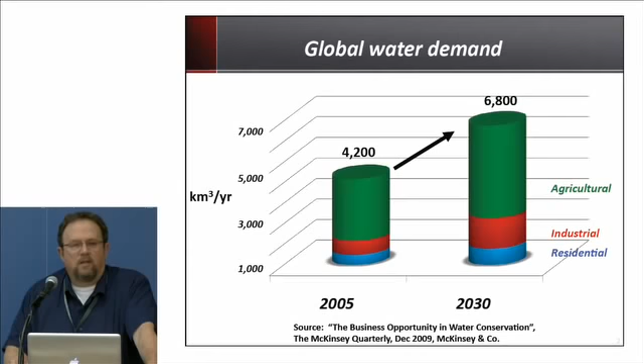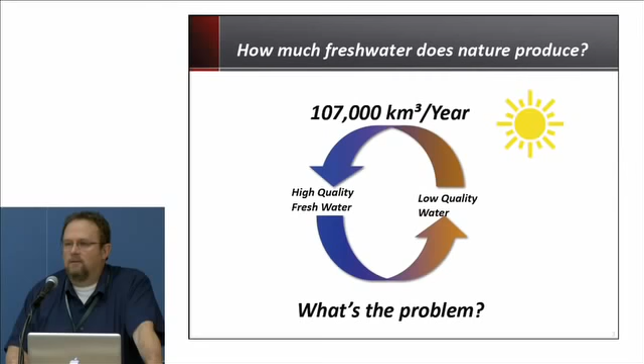6,800 cubic kilometers per year. That's a number to keep in mind now. So if we look at how much fresh water does nature produce, it produces, amazingly, through the sun, through the solar treatment system that we have, 107,000 cubic kilometers per year. We only need about 7,000 of those. So you could ask, what's the problem here, right? There's huge amounts of fresh water being created through the sun.

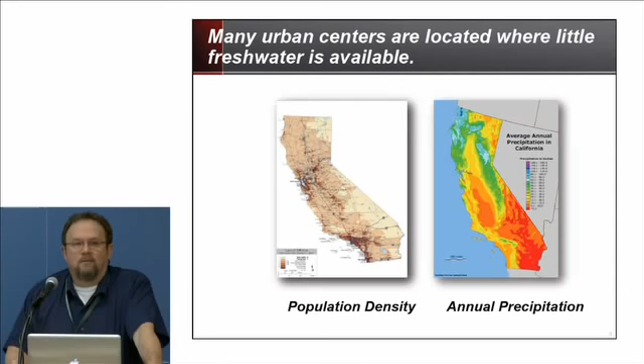So the problem is that many urban centers are located where there's little fresh water. It's a question of where the demand is. Okay, so if you look at the population density here for the state of California, you can see it's dense in regions where there's almost no water. And in the near future, this challenge is going to become even greater for the United States.

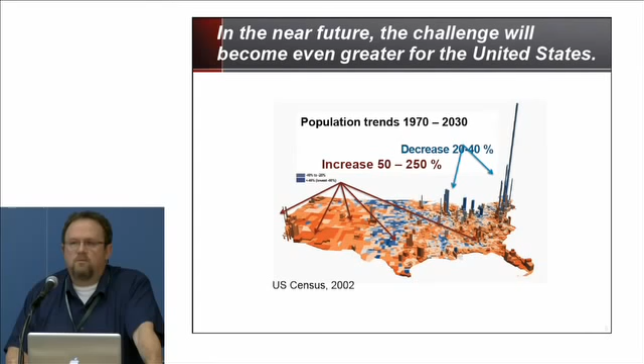So you're looking at projected trends in population and increases and decreases that will occur in different parts of the country, but in particular, in the water scarce regions, populations are going to go up. That's the projection. So it becomes even a more serious issue, this question of water demand and how we'll satisfy this water demand. But this isn't just a problem for the United States.

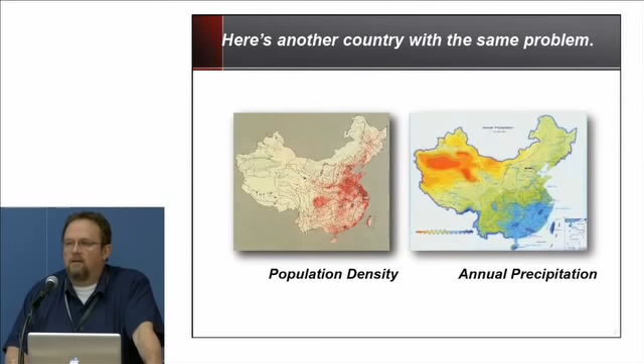So in one case, we're going from north to south with our movement of water. That's how we've solved this problem, right? We transport large amounts of water using large amounts of energy. And in California, from north to south, we're moving about 12 billion cubic meters per year. And in China, the plan is to move 45 billion cubic meters per year from south to north. So it's a huge transportation issue there, involving a lot of water and a lot of energy.

So in terms of the energy demand, for us to do this in California, we need about 2 kilowatt hours or more, depending on where you're dropping the water off, 2 kilowatt hours per cubic meter of water moved from north to south. Some number bigger than that. Now keep that number in your head, 2, and then we're going to look at what are the other options that could compete with moving water over vast distances in space.

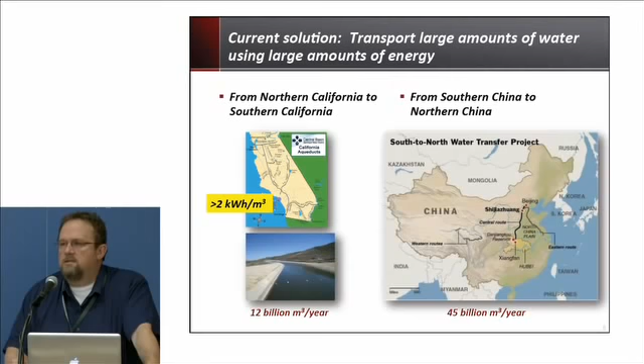So the question is, can we do better, right? And so we want to think about, well, are there local water supplies that we could tap? And of course, one that always comes to mind is seawater. We could get the water from a local supply, which would be along the coast. If you're located along the coast, you could use the seawater as a local source, remove the salt, and then you're in business, right? That would be one approach.

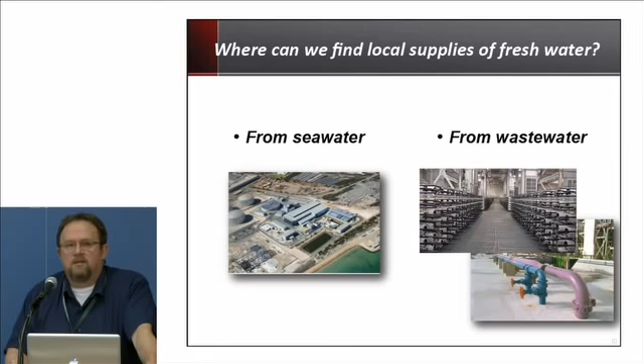Another is from wastewater. It turns out that wastewater, believe it or not, is where people are. It's local, right? It's always there. Okay, so we've got that as another option for a local source of water that could be tapped. So if we look at seawater and we compare it to wastewater, let's just do a side-by-side comparison of what's in seawater and what's in wastewater. In both, we have salt, we have organic matter, and we have nutrients. If we look at the seawater, it has about 35,000 milligrams per liter, about 3.5% of salt.

3.5%. Domestic wastewater has about 500 milligrams per liter. A teeny fraction of seawater, right? In terms of the salt contamination, we want to look at it that way.

Wastewater, by contrast, has this organic carbon, which is both in a dissolved and a suspended form, about 50-50, a little close to that. And you can see the amount that's there. And also there's nutrients in wastewater, which are lacking in seawater. Okay, so there's the big difference between these two. Lots of salt in seawater, comparatively low nutrients, and comparatively low in terms of organic carbon.

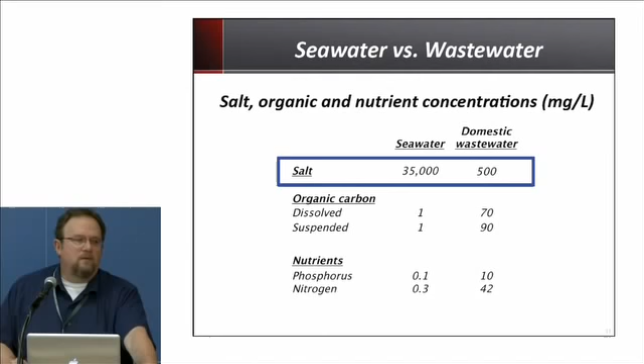So let's focus on the salt. And let's ask some questions about the salt. If we look at the energy for desalination, how much would it take to remove that salt from seawater? Well, it turns out that if these are in kilowatt hours per cubic meter, current value for removing salt from seawater using reverse osmosis technology is greater than 3 kilowatt hours per cubic meter. Now, what was the number I gave you for transporting water from Northern California to Southern California?

So here we've got a process that is significantly more energy intensive than moving that water all the way from north to south. Okay? Now, on the other hand, if we want to remove the salt from treated wastewater, it's hardly anything by comparison, right? It's less than 0.6. And I've also listed there thermodynamic limits. You can calculate, for the concentrations of salt that are in seawater and in treated wastewater, how low it could go in theory.

And you can see for seawater, we're never going to do better than 0.8. Okay, it's just a limit, a thermodynamic limit. We can't beat that. And on the other hand, with treated wastewater, you could go down to 0.03. So we see a huge energy advantage here when we're talking about purification of treated wastewater and removal of salt compared to seawater. Huge advantage.

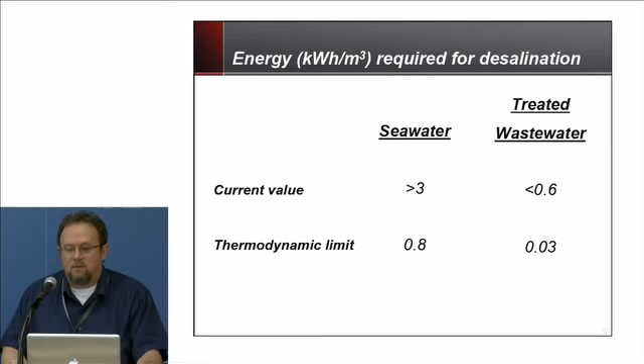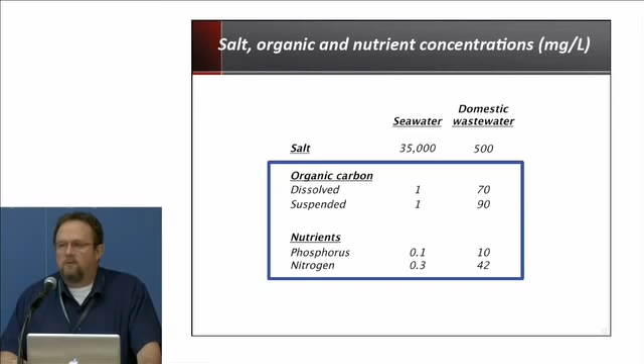So now let's focus a little bit more on the other two parts that are in this comparison, the organic matter and the organic carbon and the nutrients. And you notice in this case, we'd say, oh, advantage seawater, right? Advantage seawater. But is it really? Okay, it turns out wastewater treatment requires about 3% of the electric load of developed countries.

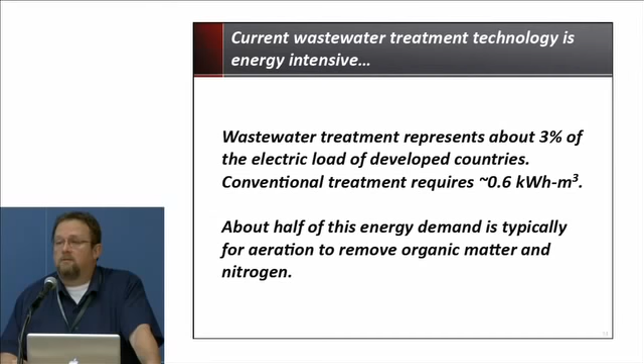And when we treat wastewater using conventional wastewater treatment technology, it requires about 0.6 kilowatt hours per cubic meter. That's used to get rid of the organic matter and the nitrogen that's in the wastewater that we just saw. That's essentially what it does. Okay, so typically about half of that energy requirement, about 0.3 kilowatt hours per cubic meter, is needed just to supply air to the microorganisms that are used to degrade the organic matter and remove the nitrogen. Okay, it's just oxygen.

So here's a treatment plant close to us at Palo Alto that we've worked with the people there for many years now to understand energy use at that plant. And they did this audit, and we've worked with them understanding the audit. And you can see here the kilowatt hours per cubic meter for each of the different units as you move through a wastewater treatment train, where different components of the wastewater are removed as you move through the train.

And what you notice at Palo Alto treatment plant, they do aerobic treatment, and there's no anaerobic treatment for production of methane, okay? Aerobic treatment to remove the organic matter that's present. They also remove the nitrogen that's present as ammonia by burning it essentially to nitrate. And then the last thing is they have this incinerator that they use to get rid of the solids, and it's extremely energy intensive. They have to import energy for this. And so altogether, they end up using 0.9 kilowatt hours per cubic meter.

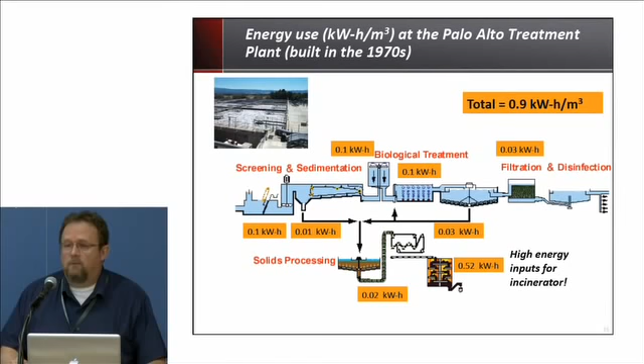That's Palo Alto. It was built in the 70s in that time frame, and most of the wastewater treatment plants in the Bay Area and in the United States were built about that time. They've all basically reached their design life. Okay. So a typical plant, as I said before, uses 0.6 kilowatt hours per cubic meter. The reason this plant is high is because of the incinerator. That's the real reason. Otherwise, it would be below average.

So rather than taking these organics and essentially burning them through providing lots of air or incinerating them, what other thing could we do? If we look at the chemical energy embodied in this wastewater organic matter, what we see is that if we were to take the organic matter out of the wastewater and burn it, it could generate, in theory, 1.7 kilowatt hours per cubic meter.

Rather than being a net energy sink, it could be producing energy. And the same with the nitrogen, the reduced forms of nitrogen. Rather than requiring energy, they could be used to produce energy, and we'll show you how here in a little bit with research we're doing.

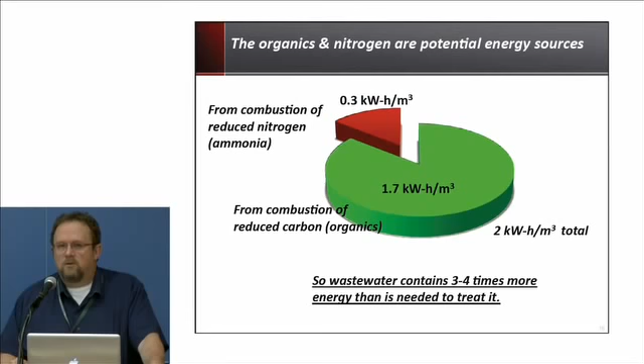So it turns out, remember that number, 2 kilowatt hours per cubic meter to move the wastewater or the water from north to south? That's about how much energy there is in chemical energy embodied in wastewater that could be harvested. So it turns out wastewater has 3 to 4 times more energy than is needed to treat it. 3 to 4 times. So you can easily envision energy neutral wastewater treatment.

So conventional treatment with anaerobic digestion of solids is accomplished this way. You essentially have wastewater coming in. Remember, I told you that some of the organic matter is dissolved and some of it is present in a suspended form that can be settled out. So that suspended matter is typically moved to an anaerobic digester like I'm showing here. And you can see that you can produce energy from that.

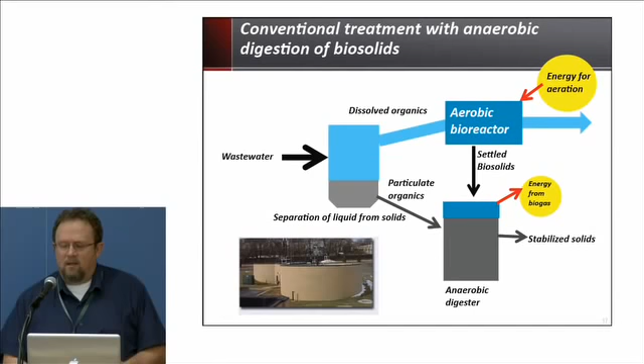Now, this would be a conventional process used, for example, today at the city of San Jose or Sunnyvale or East Bay MUD. So there's many places around the bay that do this. But the other part, the dissolved organics, are typically treated aerobically. Microbial communities that self-assemble are used to burn, essentially, these organics, and the biosolids produced are transferred to the digester to produce some energy. A lot of energy, though, is required for this aeration step.

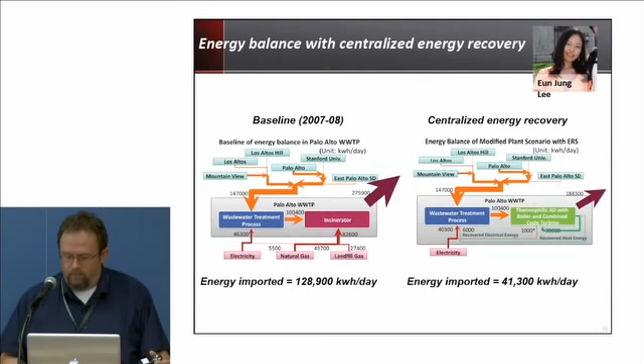If they were just to implement a conventional anaerobic digestion process with the organic matter, like I just showed you, they could decrease significantly from 129,000 kilowatt hours per day imported down to 41,000 kilowatt hours per day. And this is work that's being done by a grad student working with me, Eun Jung Lee. And this is sort of a systems level approach that we're trying to take to that problem.

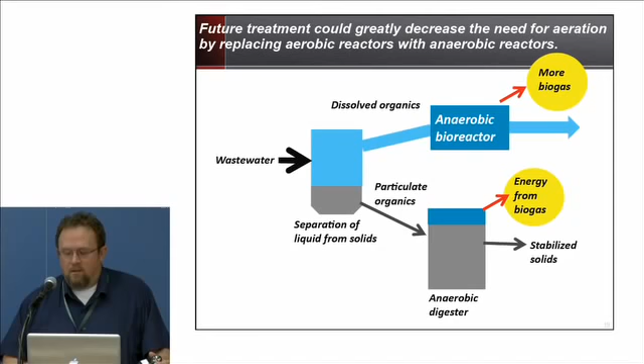So it turns out that that other part of the organic matter that we're not yet recovering methane from could be used to recover methane. So the dissolved organics stream, we could put it in an anaerobic reactor and produce more biogas. And there's other technologies out there that could also generate energy. And we're working on some. But here's one example of a promising process.

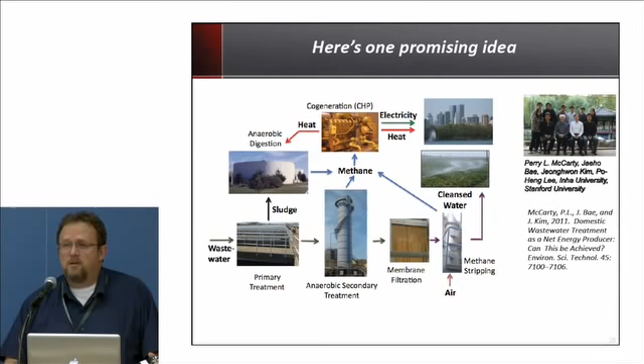Professor McCarty, who's an emeritus professor at Stanford and also working at Inha University in Korea, they developed a process where you can take this dissolved fraction and put it through a unit that looks like this. I hope you see that. Yep. And then it goes to membrane filtration. They purge it with air. And essentially this gives very efficient treatment of the dissolved organic fraction.

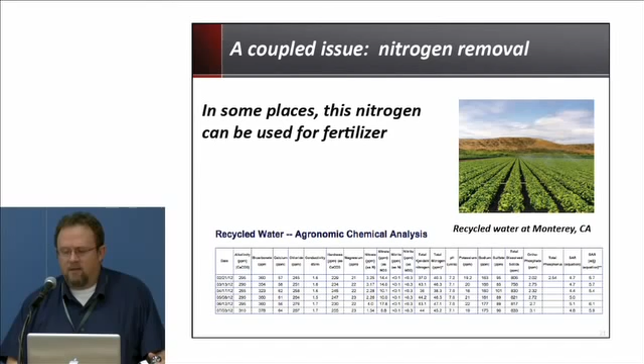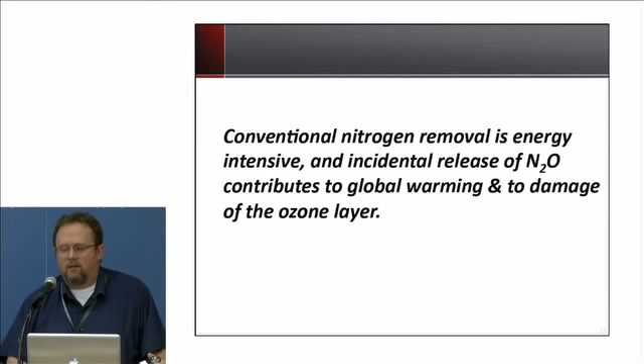Okay, now we still have this issue of the nitrogen removal. In some places, nitrogen can be used for fertilizer. Here's an example of that at Monterey. And other places, we have to remove the nitrogen and get it out. And it's being done at many different treatment plants around the bay. It turns out that the conventional process used to remove nitrogen is energy intensive, and it can incidentally release nitrous oxide that contributes to global warming and damages the ozone layer.

So if we look at conventional nitrogen removal, and here's a little bit of chemistry, we start with a mole of ammonia, and you can add up the oxygen and the electrons that are used to get it to nitrogen gas and remove the nitrogen from the water so that it's not fertilizing the Bay Area, for example. And it turns out that removal of a mole of nitrogen requires about 2 moles of oxygen and 9 moles of electrons and generates biosolids that store about 4 moles of electrons.

It turns out that these 9 moles of electrons could have been used to make a little more than a mole of methane. So we're losing the opportunity to generate energy when we do this process, this conventional process. Now, a new process we're looking at takes advantage of the fact that this process goes through nitrous oxide. And we say, well, what if we just stop this process right at nitrous oxide?

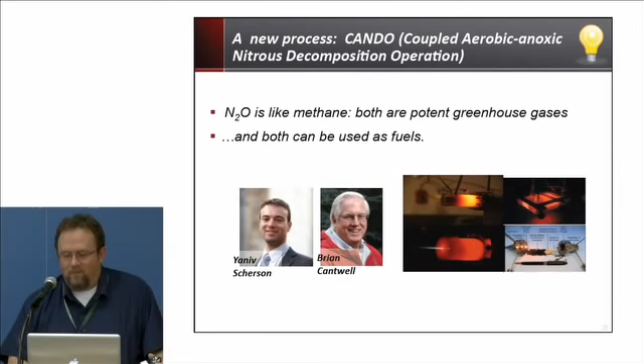Okay? So it turns out nitrous oxide is like methane. It's both a potent greenhouse gas and it can be used as a fuel. And I learned this from Yaniv Scherson, who showed up at my door one day; he's working with Brian Cantwell in aeronautics and astronautics. They're using nitrous oxide as a fuel. They can run these little cool looking devices, as you see here, little engines essentially.

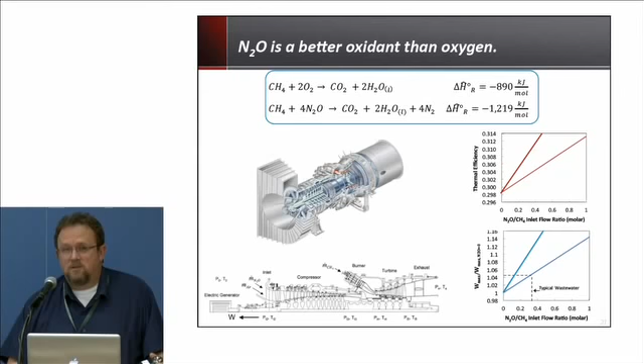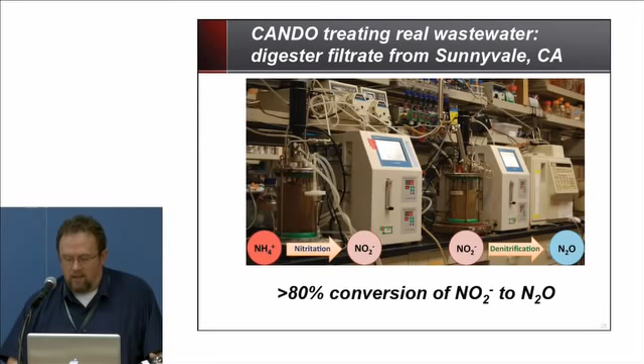And then two methods: biological PHB is a method we use to convert nitrite to nitrous oxide, or a chemical process. And it turns out if you do this, nitrous oxide is a better oxidant than oxygen, so we get more energy from these engines. And that's the big advantage here. It gives an energy boost. So we're treating real wastewater right now from anaerobic digesters from Sunnyvale, California. We've also been doing East Bay MUD more recently and getting high efficiency of conversion of nitrite to the nitrous.

Okay? So this isn't yet scaled up. We're working with groups around the Bay Area to do that. It uses a rapid process. We could maybe get phosphorus removal as well with this process, and we think it will be flexible for retrofits of the existing systems.

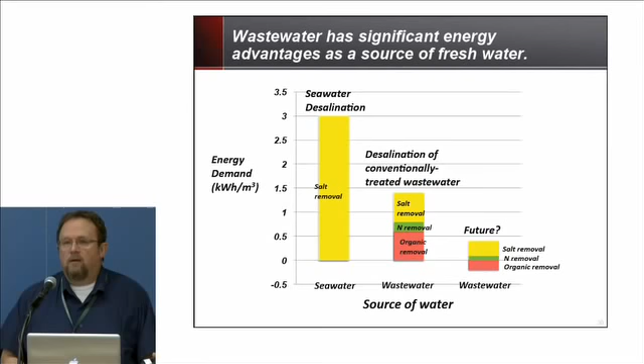If we look at then seawater and wastewater again, there's the energy demands, and we say, let's get the salt out of seawater. This is what it takes, about 3 kilowatt hours per cubic meter. Using conventional treated wastewater and desalination, it would take this much energy now to get the higher quality water. In the future, we could potentially get even lower than that. And so I'm showing the options where you have salt removal, but we can surely get to the point where we can get the organics and nitrogen out without any net energy expenditure.

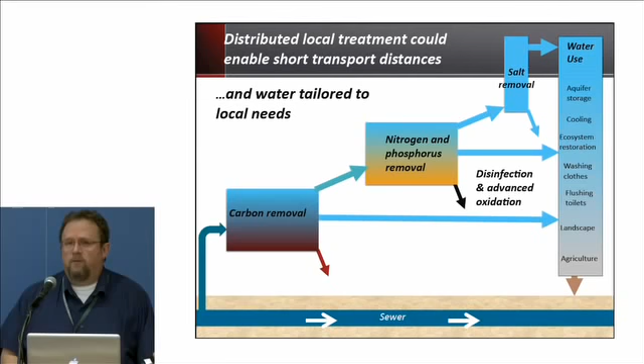So distributed treatment is another thing that we were interested in. This is where you take the sewage out of a sewer, remove the carbon, disinfect it, and then use it for local uses. Another option is to remove even more contaminants like the nitrogen and phosphorus, and then it can be used for higher level things. And if you remove the salt, you can get very high level uses. And as I showed before, we can estimate now what we could be in terms of energy with doing all of those 3 steps and tailoring the water for different applications locally.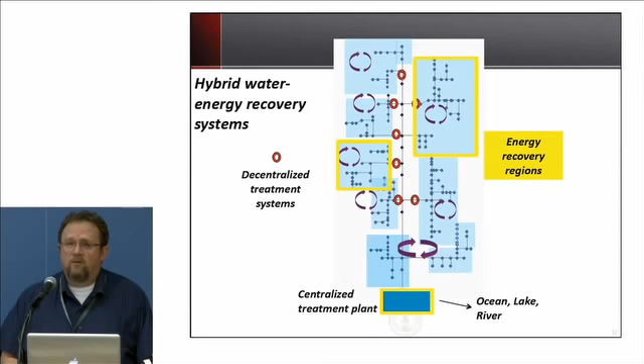So you can imagine hybrid water energy systems where water is recovered in different local places, reused locally through local treatment systems, like that. And we might even have some places where it makes sense to recover energy as well from these organics. And in the future, what I expect is that we'll have more and more integrated water and organics management.

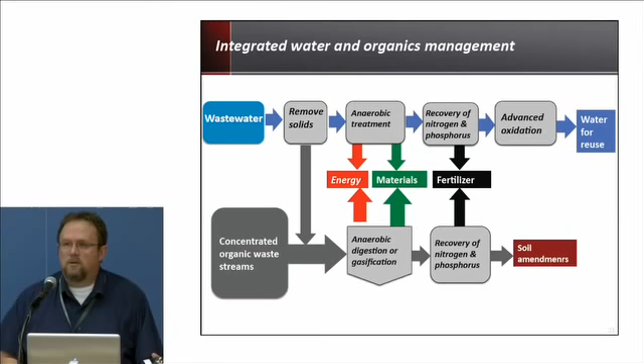So here's wastewater going through its treatment process to get clean water. From that, we get the solids out, and you could have organic waste that is collected in another way that is combined with these organics here, and we digest them, recover nitrogen and phosphorus, and we create a whole variety of products. So wastewater treatment plants become resource recovery centers. And this is just showing a place I was at just 2 weeks ago, Sejong, South Korea. It's a city in the center of South Korea they're building.

And I just want to show you that here's a place where they're doing integrated organics waste management. So biosolids are being produced from the wastewater and digested here. But they also take food waste and plastic, and they separate them through this interesting vacuum collection system. You put this stuff in what looks like a mailbox here, and it just sucks it. And then it separates the plastic from the food. And the food is digested in these digesters, and the plastic is converted into pellets that they incinerate.

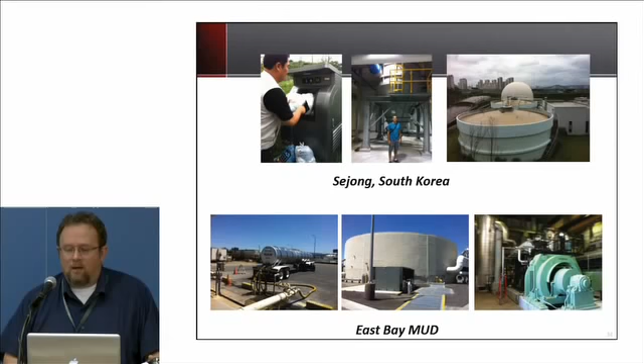And then this is East Bay MUD here. And this is, I think, the first wastewater treatment plant in the United States that's energy positive, producing energy from biosolids. And they've done it by bringing in organics from all around the community from different sources, food waste, fats, oils, and grease, and so on. And they're digesting them in their digesters and producing more energy now than they bring in. So it's a net energy exporter.

And so that's the end of my presentation. I do want to advertise a couple of classes that I teach. 177, Aquatic Chemistry and Biology. If you have that class, you can take the subsequent class, Environmental Biotechnology, which has to do with these kinds of use of microorganisms to recover clean water, clean energy, and also valuable materials. Thanks.